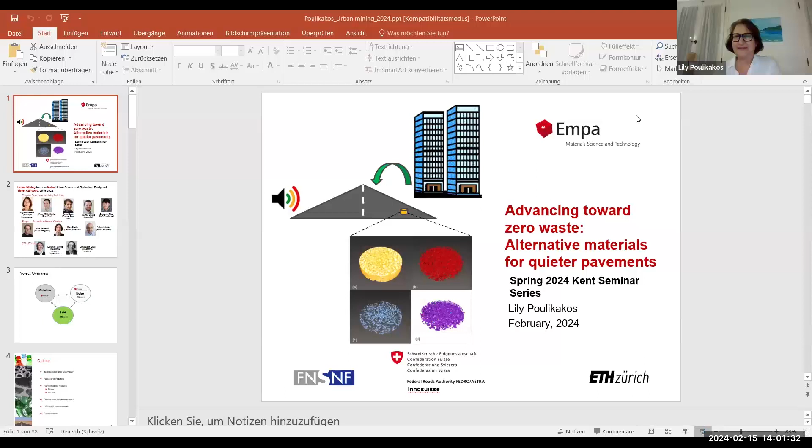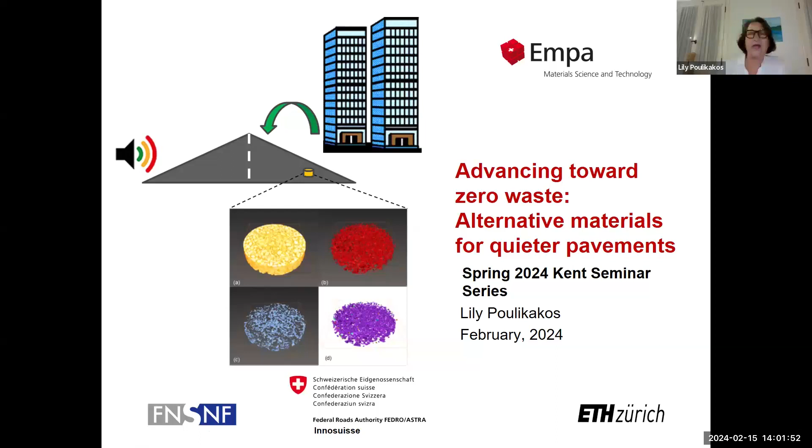I'm going to talk to you about two topics today. One on alternative materials for roads and the other about quieter pavements. So noise and alternative materials. I'd like to start by acknowledging my colleagues. The projects that I'll be talking about today had three groups working on them. Two were from EMPA, the institution that I represent. So I'm coming from a concrete and asphalt lab at EMPA. We're also working with the acoustics noise control lab and also ETH Zurich.

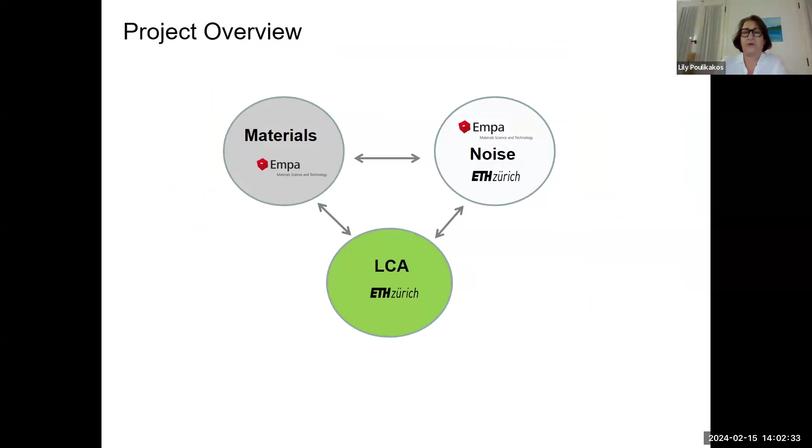So there are materials aspects to the project, there are noise aspects to the projects, and there are life cycle assessment aspects. And here you see on this slide the different organizations that are involved mainly in the different aspects. So I'll start by giving an introduction, some facts and figures. I'll give you some sample performance results on the binder scale and the mixture scale.

And so anytime that we use alternative materials for roads, it's very important to also look at the effect on the environment. That's on the one hand, and on the other hand, perhaps we can make these materials work mechanically, but does it really make sense to use these kinds of materials? For that, we need a thorough life cycle assessment. And I'll give you some examples of that, and I'll finish with some conclusions.

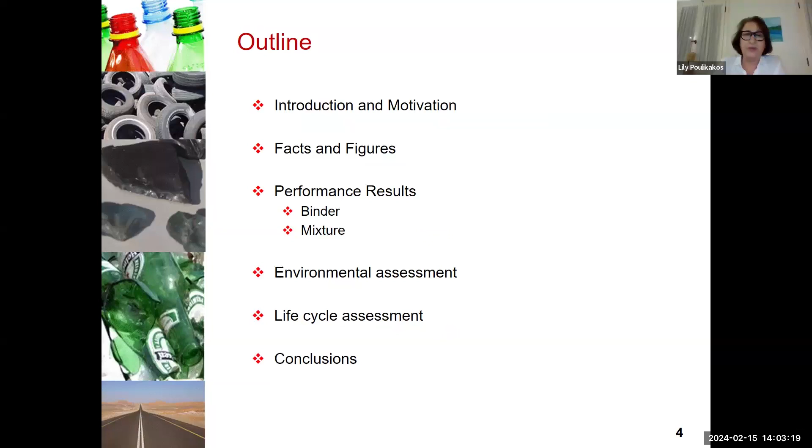So first of all, on the topic of waste, there is a lot of waste gathered around the world, and these are some numbers from Europe. For example, you see concrete that comes from construction demolition waste. Every year in Europe, 350 million tons are generated, and about 260 are still available. So a lot of it is reused and recycled. However, still millions of tons of all these materials are still available. Perhaps some of them can be used for the road.

And on the topic of noise, you see in the two paragraphs at the bottom of my slide, the World Health Organization has indicated that in the EU, the European Union, and Norway, traffic noise is the second biggest environmental problem after air pollution that affects the health of people. And also after particulate matter, noise is the second major cause of disability-adjusted life years. So it is very important to look at noise and also to look at waste.

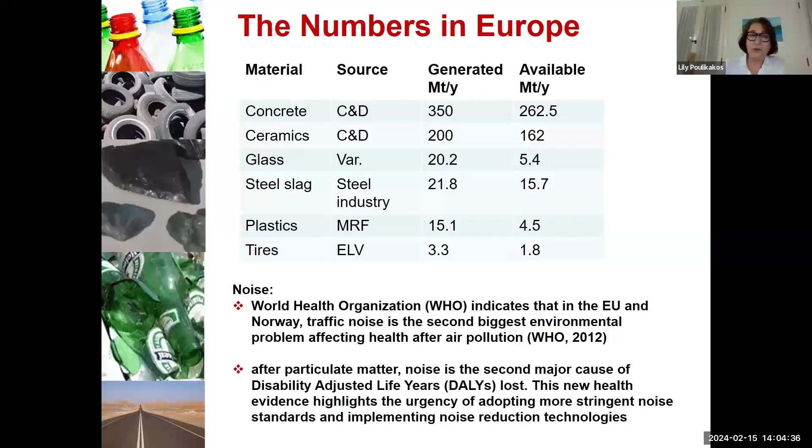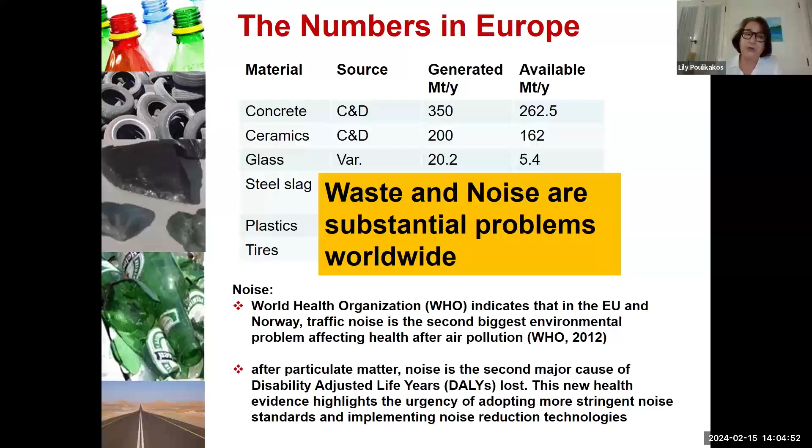Now, why do we care about using alternative materials? Well, it is because we would like to contribute to the circular economy. We would like to use basically raw materials that are environmentally friendly.

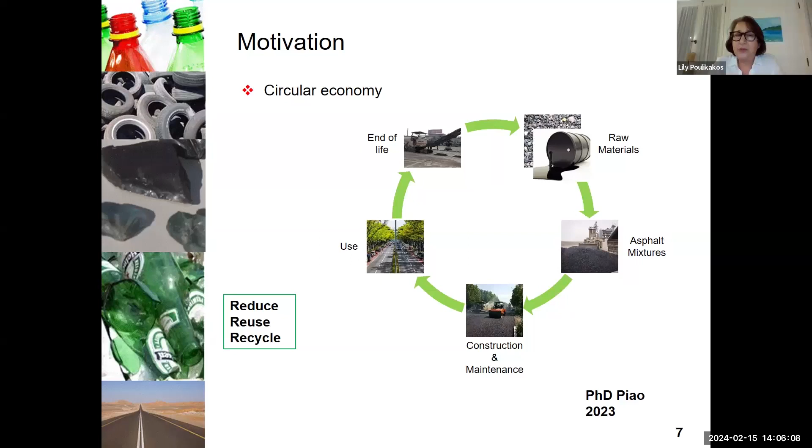Also, when we produce our asphalt mixtures in the construction, maintenance phase, in the use phase, and end of life, throughout the whole life of the pavement, it's important to keep in mind that we need to consider the reduce, reuse, and recycle principles in order to contribute to the circular economy.

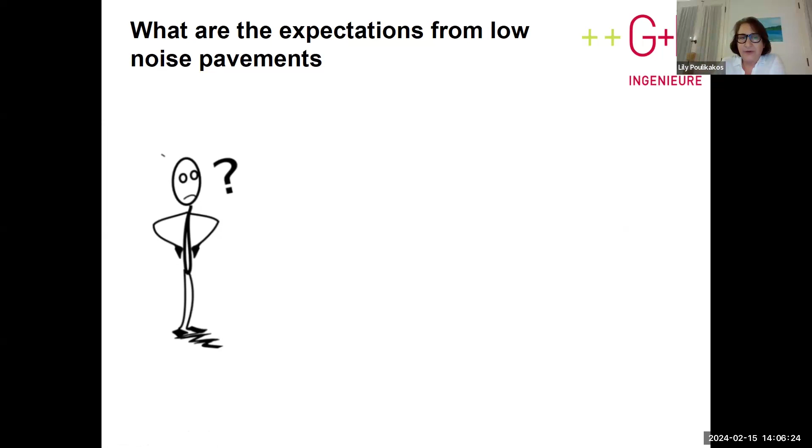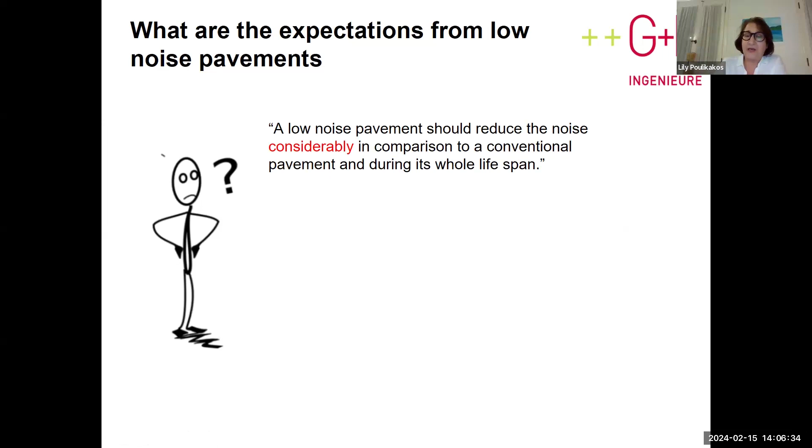Now, what are low noise pavements? Well, there is a definition for low noise pavements. They are pavements that should reduce the noise considerably in comparison to a conventional pavement, during the whole lifespan of the pavement. So here is an example that I can show you. If we compare the low noise pavement to a conventional pavement, in this case it's AC11.

If we reduce the noise by 1 decibel throughout the lifetime, that is equivalent to reducing the traffic by 20%. If we reduce the noise by 3 decibels, that is equivalent to reducing it by 50%. And in this case, we probably would have to replace the pavement after about 12 years. This is what is done normally in Switzerland. And if we can reduce it by 6 decibels, then we can reduce the traffic by 75%.

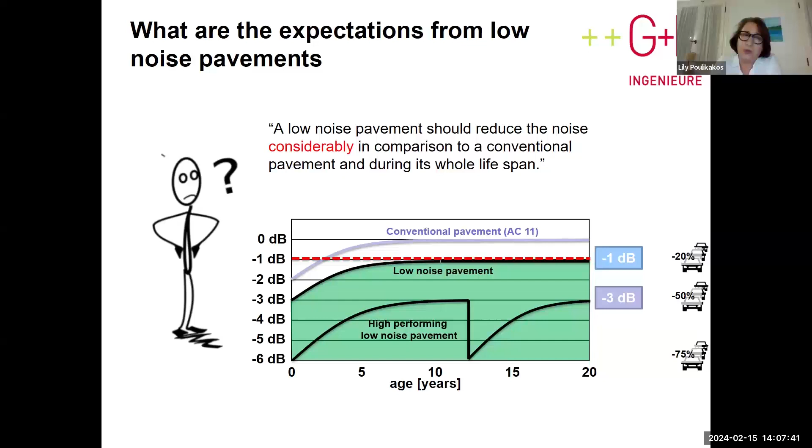And if you remember what the World Health Organization has told us, it is very important to reduce the noise and reduce exposure to noise. So if we can reduce the noise at source, at the pavement, then that's a very important tool that we have in our hands. And in Switzerland, what type of low noise pavements are used?

Well, on the one hand, there's porous asphalt that has high air voids, and there's semi-dense asphalt with a little less voids, and then also the texture can be optimized. But as we reduce the noise, we also reduce the durability. So porous asphalt also has lower durability than the other options. So the different options also have different capabilities in terms of reducing the noise.

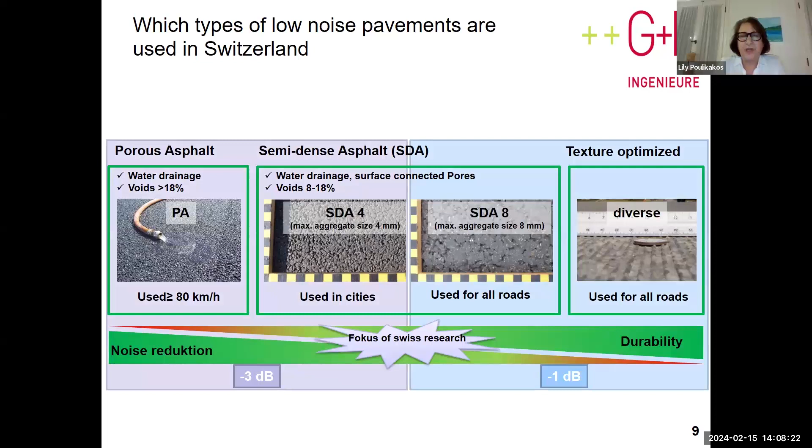Now we have published some papers about what the experience with alternative materials is within the available literature. And here I have some samples of the waste materials in the left column, and we've looked at rutting resistance, moisture resistance, stiffness, and fatigue. And we see that many of these alternative materials can perform better or similar to virgin materials. With the upward facing arrow, we're showing this.

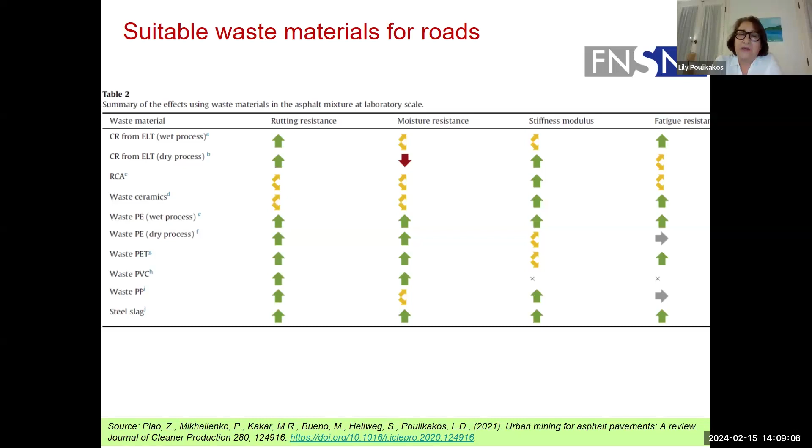So basically what we see in the literature, what our colleagues have shown, is that it's possible to use these types of materials. However, the technology readiness level for these different kinds of materials is not the same. So this is the sample of the materials, and for example, we see the crumb rubber using the wet process has a very high TRL level. We estimated it to be from 7 to 9, and that means the application is partially or completely industrialized.

However, there are other types of waste materials, such as recycled glass, with a low TRL that indicates the information is only at the laboratory scale. So in our projects, we have looked at various types of materials, and I'll show you some results for that. Some of this is also geographically limited. For example, crumb rubber is widely used in some countries and it's forbidden in other countries. So there is a bit of a knowledge gap when it comes to all of these materials.

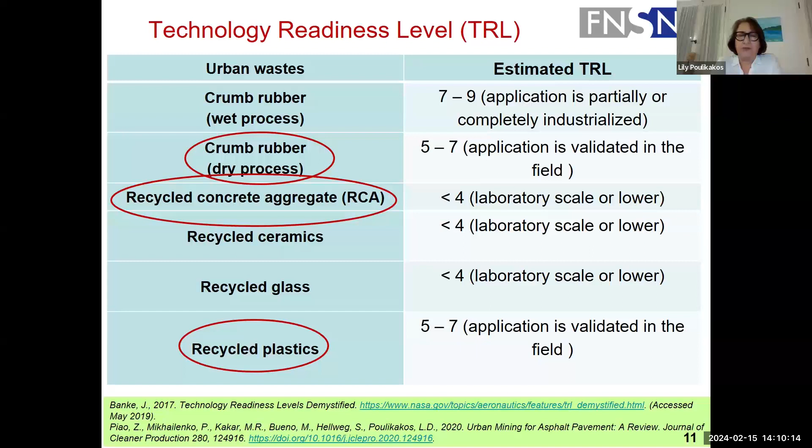So we are using a multi-scale approach to look at the materials. Mostly the information that we have is at the centimeter scale, like for example, the indirect tensile strength or water sensitivity and so forth. But in addition, we have looked at the micro scale, the microstructure. We looked at chemistry. We have also looked at some select mixtures at the meter scale, and we've also looked at the life cycle assessment.

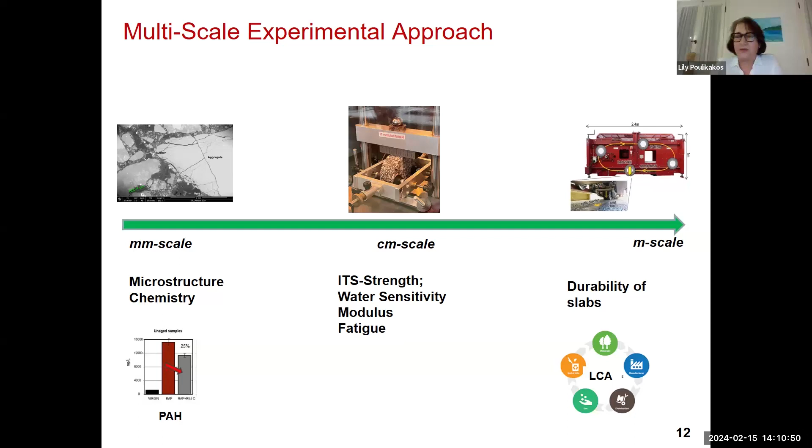And as you all must know, our material is very temperature sensitive, so we really need to look at the performance at the various temperatures. And particularly since we are using alternative materials, that might make our mixtures more susceptible to cracking or to rutting. So it's very important to keep that in mind.

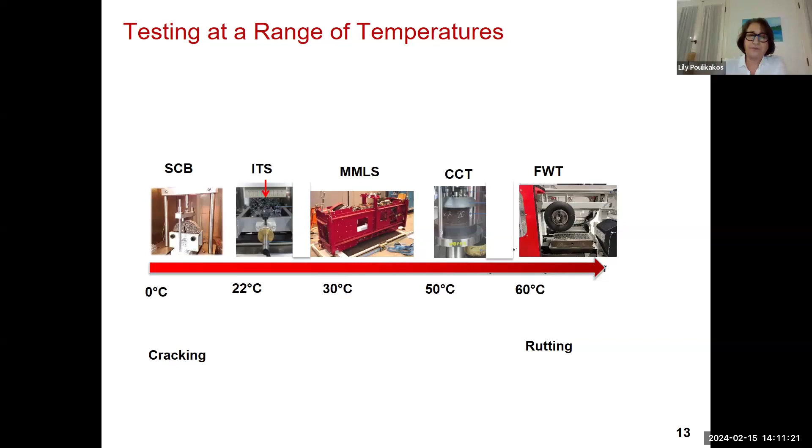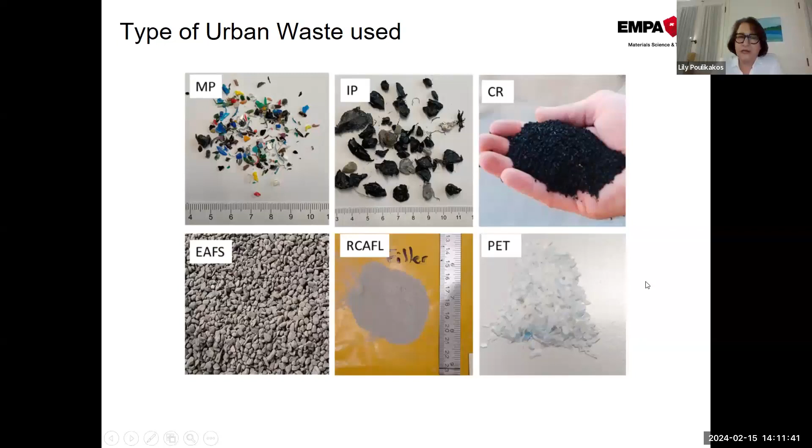Here are some of the types of urban wastes that we have looked at. So two types of plastics, crumb rubber, electric arc furnace slag, recycled concrete aggregate filler, and PET are some of the materials that we have looked at, and I'll show you some of the results. We have used some of them as a binder additive and some of them as replacement for aggregates.

After some initial screening tests, we have looked at the low temperature and high temperature performance of the materials, and selected mixtures have been looked at with a load simulator. We've done some leaching tests and some LCA on some of these selected mixtures.

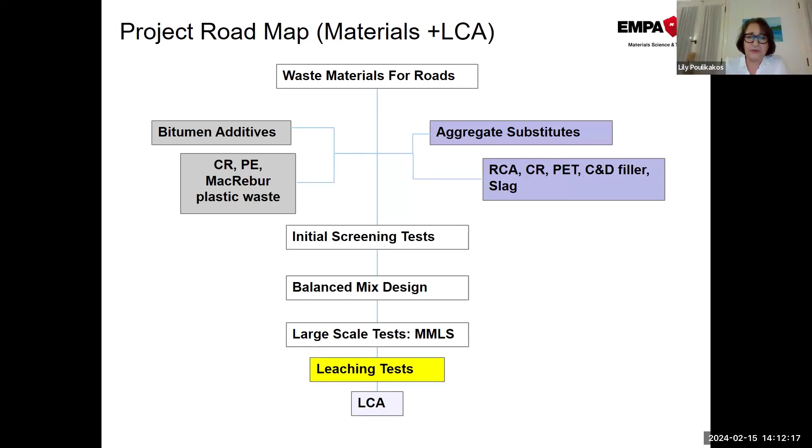So I'll start by giving you some examples of the binder results. What I'm showing you here is the binder that is exposed to the electrons in an electron microscope. And after a while, they develop these types of microstructures, these fibril formations. And the second sample that I'm showing here is the same binder with rubber in it. So the rubber introduces some disruption of these microstructures.

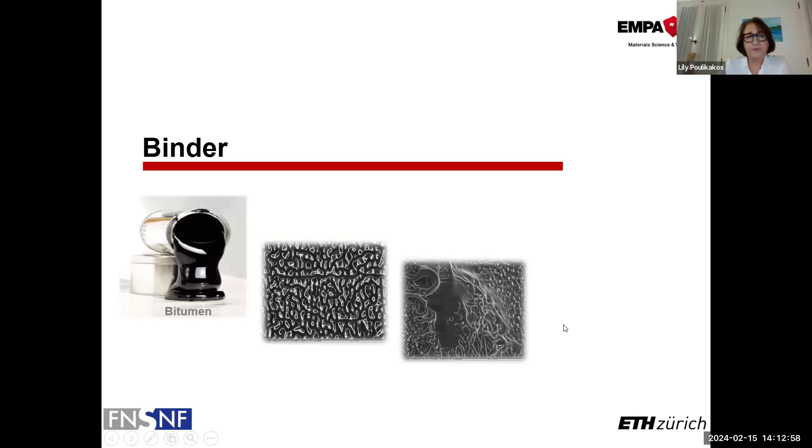Now, looking at the plastics, the recycling plant that I mentioned earlier, we were there and we picked up some of their materials. So they produce 16,000 tons of polyethylene per year. This is from packaging. And so they produce pellets from this waste, and they sell these pellets, as you see in the middle of the screen. However, in the production process for the pellets, they also produce a lot of waste, and that's what you see at the bottom. And this waste is used in the cement factory as fuel.

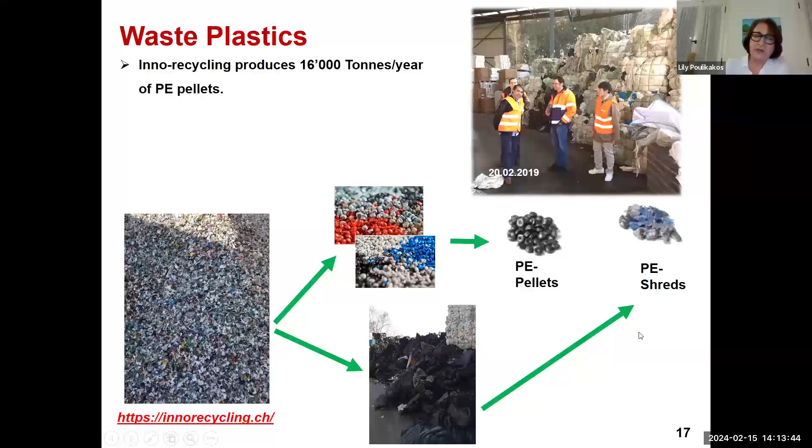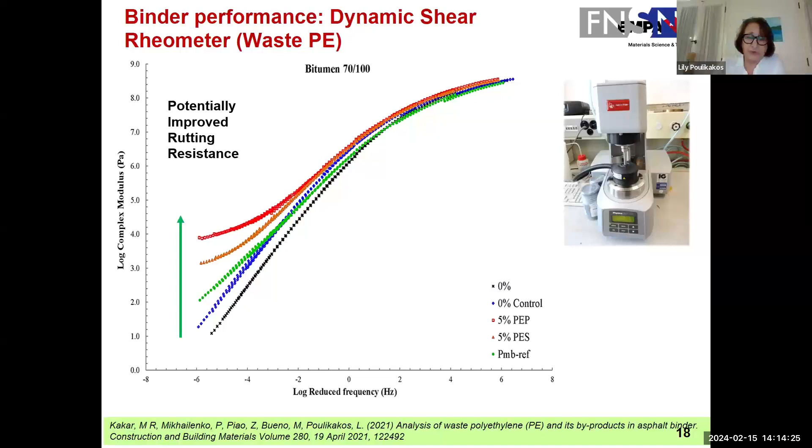So we picked up both of these plastic wastes and brought them into our lab, added them to our 70/100 straight run bitumen, and looked at it with our DSR. And what we saw is that both of the plastics, the red and the orange plot, show an increase in the modulus at the high temperature zone, even more than our reference that was polymer modified, shown here in green. So we thought that there's a potential for these waste plastics to help in the high temperature range, for example, for rutting. I will show you the mixture results in a few minutes.

We also looked at viscosity. So here we're introducing a performance index, just a simple index that's a ratio of the performance of the waste-containing material to the control with no waste. And if, for example, the value is 1, that means that the performance was exactly the same. And we saw some interesting results.

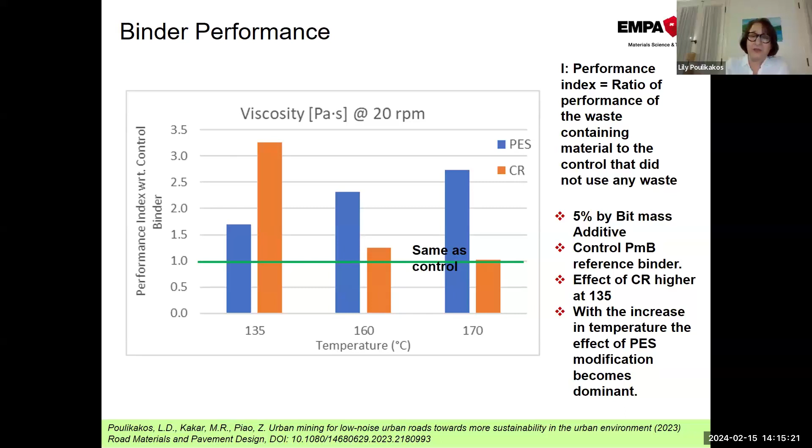So we see the viscosity here with respect to temperature for the polyethylene, shown in blue, and the crumb rubber, shown in orange. And we see that there is an increase in comparison to the control in all cases. However, the trend seems to be different with respect to temperature. And that was very interesting for us to see that the results were different.

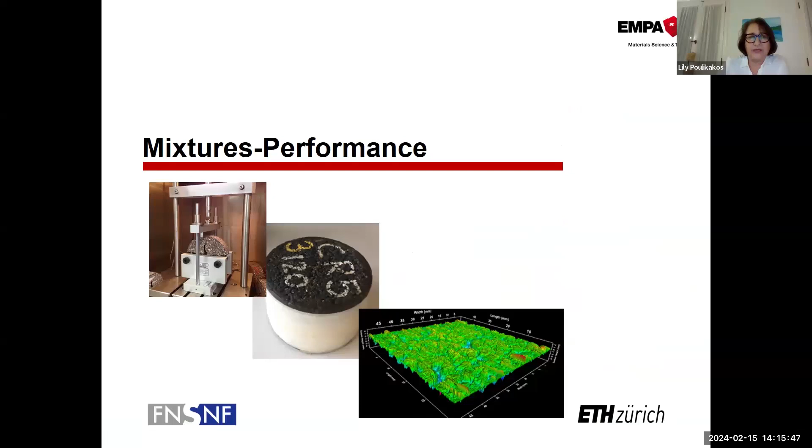Now, moving on to the mixture performance. Here in green, I'm showing you the surface texture. The surface texture is actually very important for the noise performance of the mixtures. And I'll show you some results from the various mixtures that we have tested. So again, as I mentioned before, it's very important to look at high and low temperature performance, as these materials might be particularly susceptible to rutting or cracking.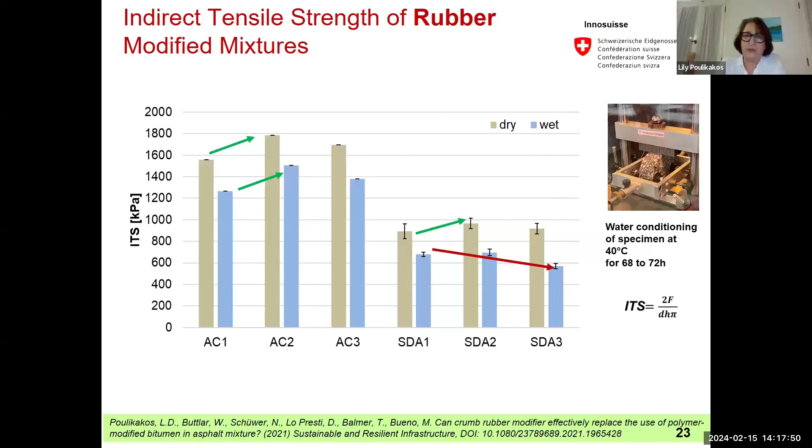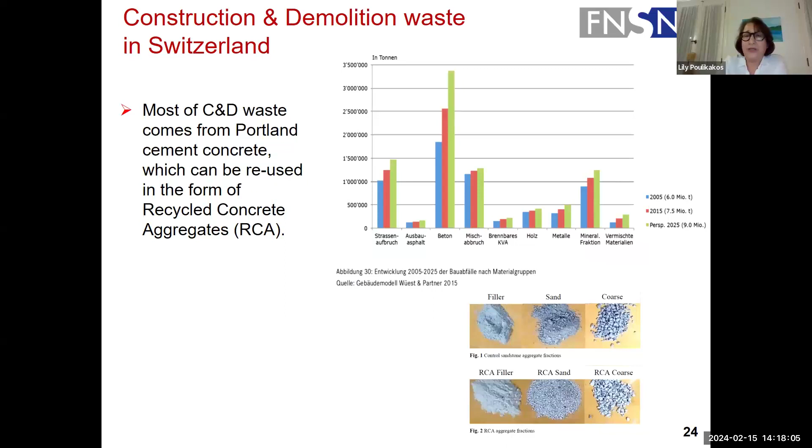So I'm moving now to another material. Most construction demolition waste comes from Portland cement concrete, which in German is called Beton. And you see here the amounts of the different contents of construction demolition waste. And also in the lower part of the slide, you see the different fractions.

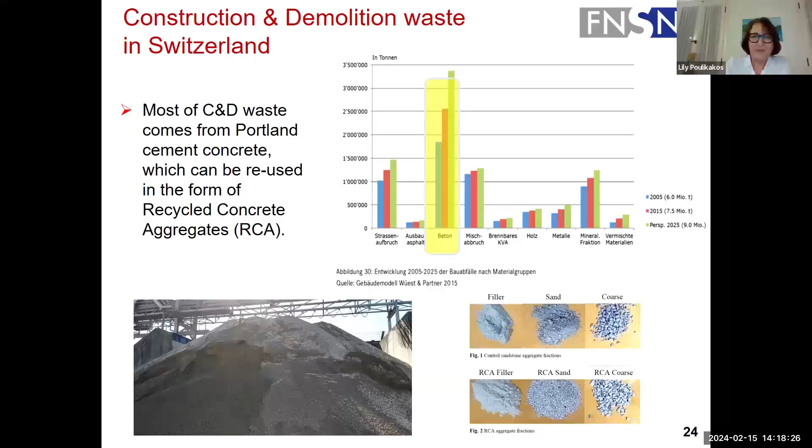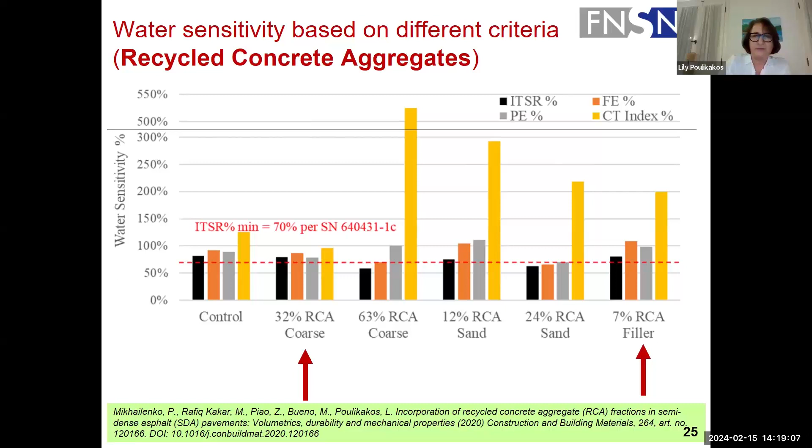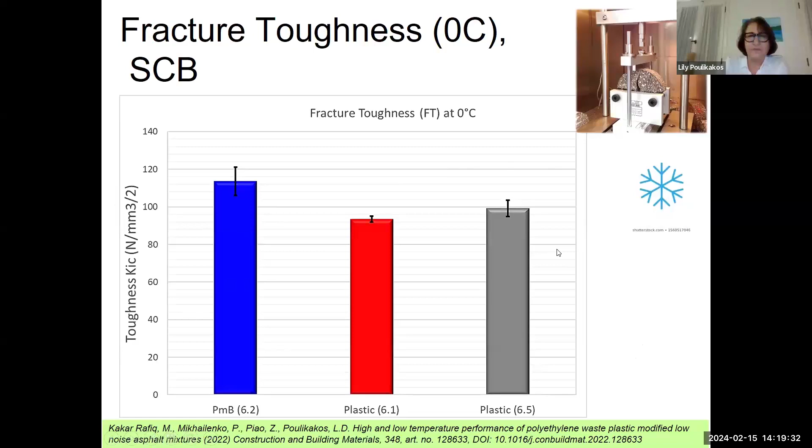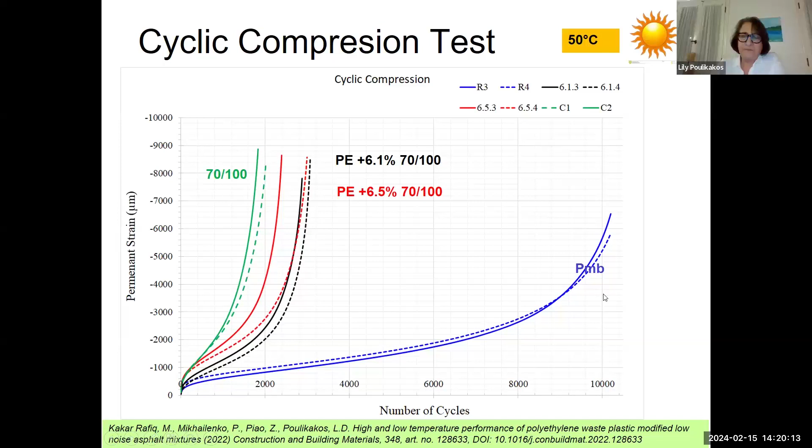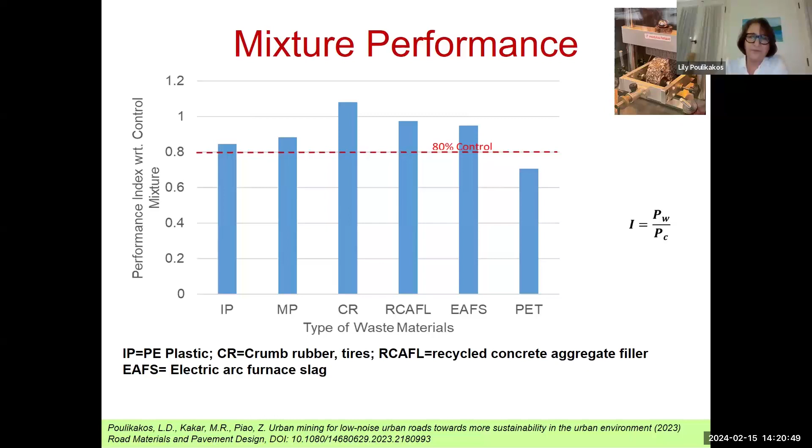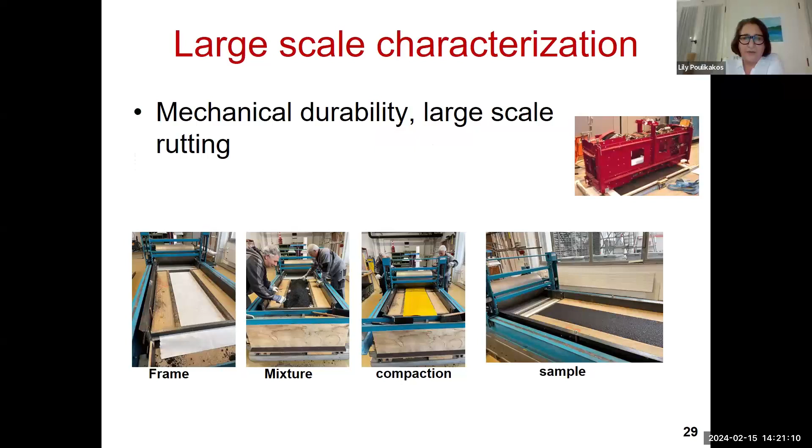Now I'm moving on to the larger scale characterization methods. Here I'm showing you how we prepare the samples. These are large samples, large slabs that are produced using a frame and using a roller compactor. And you see that we are using a traffic simulator to test these.

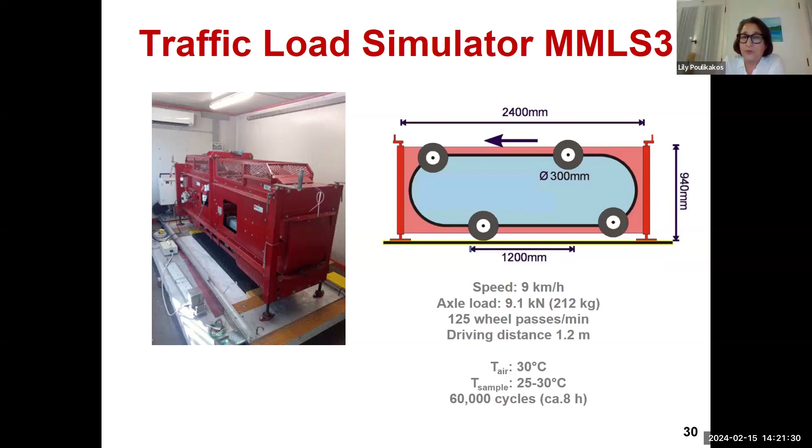There are 4 wheels for this traffic simulator. It goes at a speed of 9 kilometers an hour and an axle load of 9.1 kilonewtons. And these tests were performed at 30 degrees. So basically we are testing for rutting, but on larger slabs.

And so here I'm showing you an example of the crumb rubber modified mixture. You see in blue, that's the polymer modified mixture, and these are the two with the rubber. So there is more rutting for the two crumb rubber modified mixtures. However, the maximum came to below 6%, and also the absolute value of the rutting was below what is normally considered acceptable. So for example, for other tests, 7 or 10% are something that is acceptable.

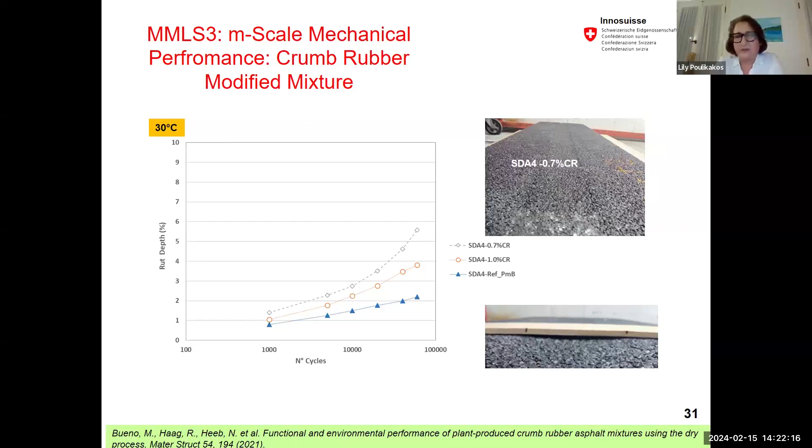Also, we did these large-scale tests for the recycled concrete aggregate modified mixtures. This is only the filler was replaced. And so we don't see any significant disadvantage of using the RCA filler for our mixtures in comparison to the control.

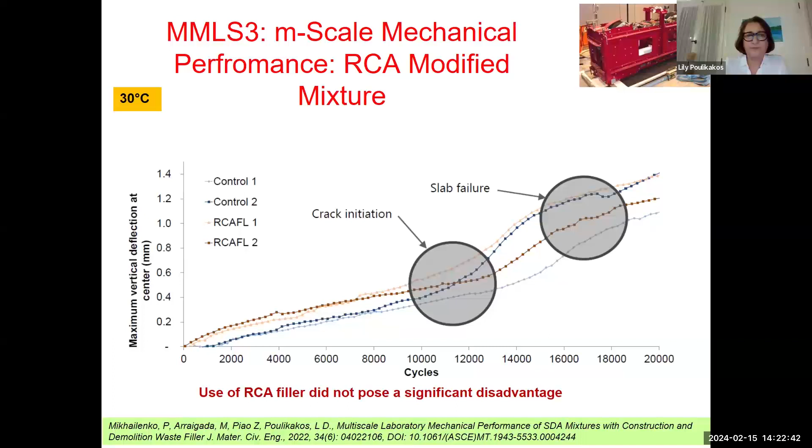So as I mentioned earlier, anytime that we use alternative materials, we do need to look at the environmental effects. So here I'm showing you an example of leaching tests. We've used the rolling bottle test for these. And so the Environmental Protection Agency from the US has identified 16 priority PAHs.

Here you see these 16 PAHs and the pattern of leaching for reference SDA. And you see the pattern for only having crumb rubber. And in the middle, you have the mixture that has actually 1% crumb rubber.

Excuse me, I'm losing my voice.

So we see that the reference SDA and the 1% crumb rubber SDA have a very similar pattern. So we could conclude that the leaching was not due to the crumb rubber, but it is due to the asphalt itself.

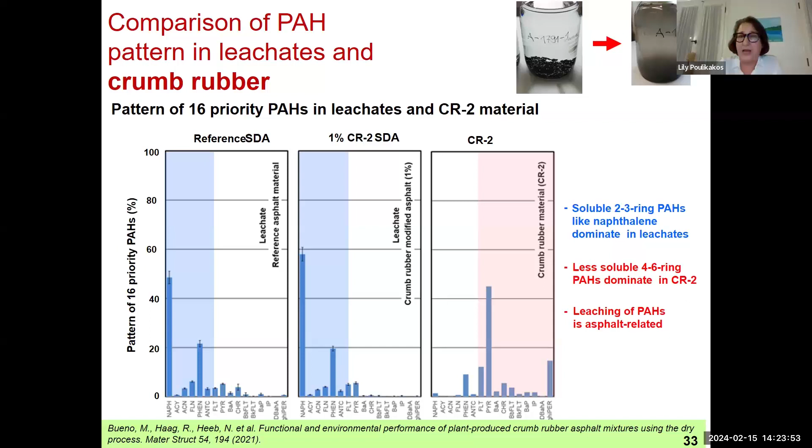And I mentioned that we need to also look at acoustic performance. So the acoustic performance is affected by porosity, by mean profile depth that has to do with the surface texture, and acoustic absorption. So here you see these three parameters for our reference and for all the mixtures that we have used.

And several of these that I'm showing with the yellow arrow actually have very similar values to our reference. So it's possible to have similar noise reduction properties with the waste materials.

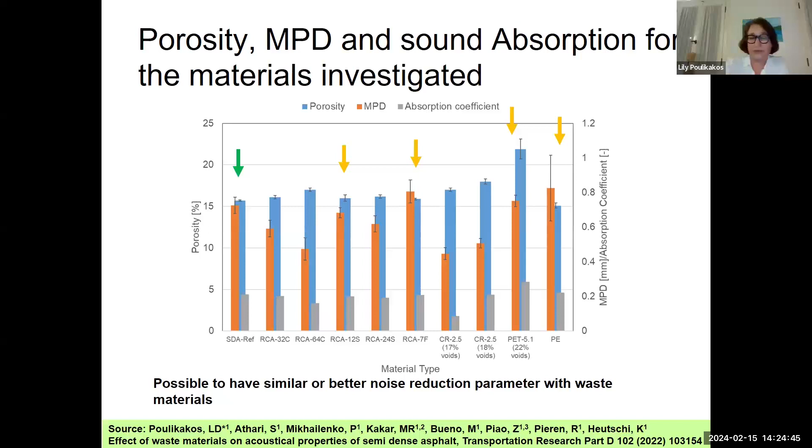So I'm moving on now to the topic of life cycle assessment. I mentioned to you also earlier that we can make these mixtures work, but does it really make sense to use these mixtures? For that, we need to look at the life cycle assessment.

And here we're showing the greenhouse gas emissions for crumb rubber modified mixtures. So we have a reference scenario that is actually without rubber and the test scenario that is a mixture with rubber. So in Switzerland, the crumb rubber is used as fuel for the cement factory.

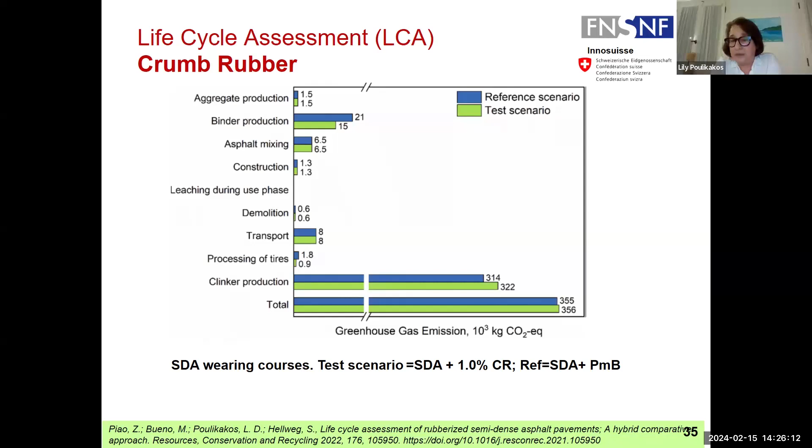So if we remove this from the cement factory, then they have to replace it with primary fuels. And that is why the clinker production is higher. The greenhouse gas emissions for clinker production are higher for the test scenario, and that results in our test scenario being a little bit higher in terms of greenhouse gas emissions. However, if the waste management policy in the country is that the material is going to the landfill, then this image is going to be completely different.

So we've gone through this exercise for various types of waste materials. And here is with a certain type of plastic. This is the crumb rubber. This is the recycled concrete aggregate filler and electric arc furnace slag. And introducing again the performance index, we see that it is possible to reduce the greenhouse gas emissions by using alternative materials.

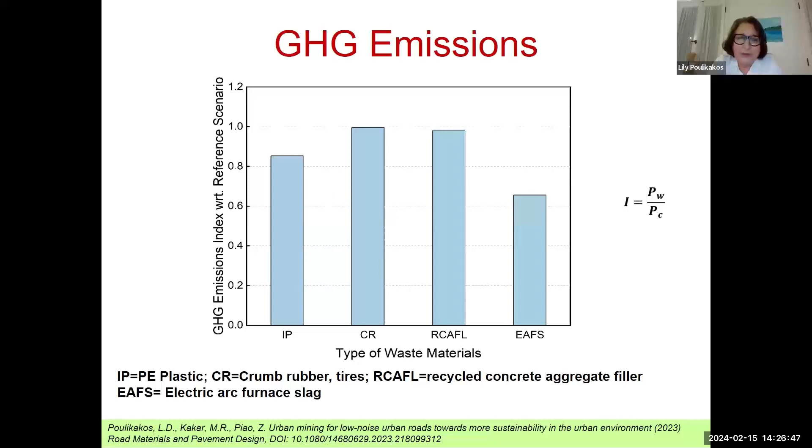So that brings me to the conclusion of my talk. I hope that I was able to convince you that many waste materials can be used as substitutes for virgin materials. We saw that we could reach about 80% of the performance for semi-dense pavements. It's possible that we have to do mix adjustments, for example, increasing the binder content or similar.

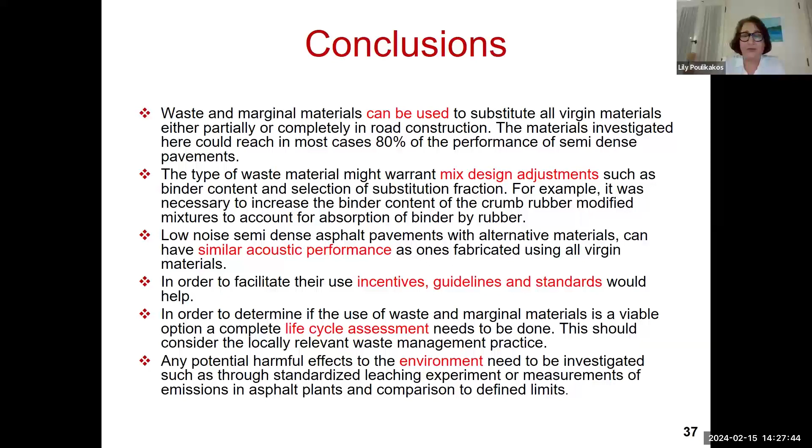And also we were able to see similar acoustic performance looking at some of the various types of parameters that affect the acoustic performance. However, we do need incentives, guidelines, and standards, and that's not always available in all countries. And so a thorough life cycle assessment and an environmental assessment is absolutely necessary when using any kind of alternative materials.

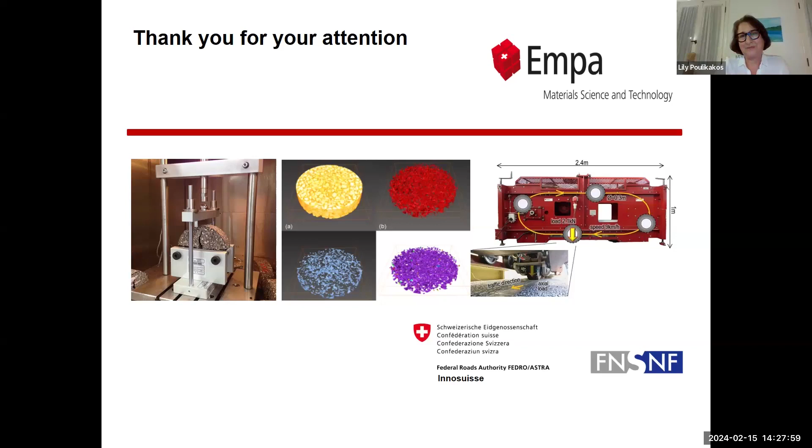If we have questions here in the room. So yeah, Professor Haj. Yeah, thanks. Really great presentation and very interesting studies. I have two main questions. One, in terms of the ESEM work that you showed, we've been working a lot with the environmental SEM, and I was wondering how you quantify what you see in that fibril structure as the beam damage happens, and how you see that relating to the performance of the binder later.

So we did not relate them to the performance. We just saw them as a characterization method. We have seen that there is a change in the microstructure when we have, for example, crumb rubber in there. With the fibril structures with the crumb rubber, there is a disruption of the microstructure, but we did not relate it. We also have other results from, for example, rheology and so forth.